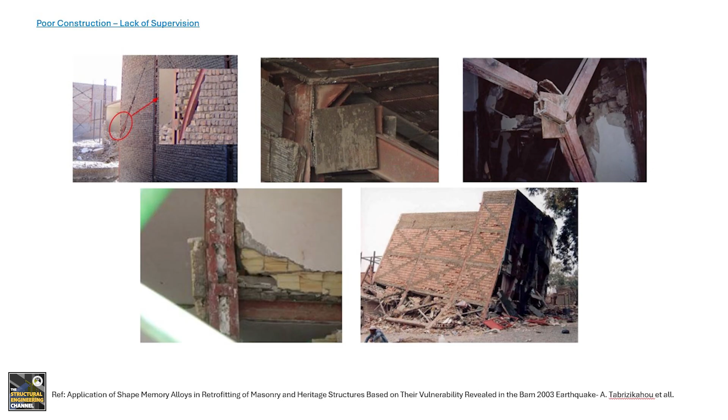My journey to structural engineering started because of my love of mathematics, physics, and creativity. But I got into earthquake engineering actually because of my personal experiences. I am originally from southeastern Iran, which is a very high seismic risk and active region. And I have experienced a few major earthquakes, such as the Bam earthquake in 2003. And that actually affected me a lot. And I wanted to pursue my study in earthquake engineering to know more about this inevitable event and be part of the global efforts to reduce the risk and reduce the impact on people.

Earthquakes are tricky because they are not just natural forces that are applied to the structures. They are really dependent on the structure itself. And if we have a structure with more weight, it will get more seismic forces. So to me, being part of the resilient design practice is very important, and I'm especially interested in multi-hazard analysis, like combining wind and seismic loads together, especially for renewable energy structures, which is a trend these days moving toward more sustainable cities.

Interesting. We had 3 earthquakes here yesterday in the Bay Area that people felt. Oh, and I've definitely lived through a couple of big ones as well. So it can be kind of life-changing, right?

Yes. What are the primary differences between earthquake engineering and then traditional structural engineering? I believe the differences lie in the focus on the design considerations and analytical approaches for these two. Actually, earthquake engineering is a specialized subdiscipline of the structural engineering practice, and it means that everything that a traditional structural engineer should know about the design procedure, material behavior, load combination, everything is required for a seismic engineer as well.

We can separate the regions into low, moderate, and high risk regions and apply different strategies. But in general, I think the strategy should be in policy making, design, construction, and utilization of structures, and in 3 steps: pre-earthquake, during the earthquake, and post-earthquake, regarding the loss estimation, the mitigation programs, or the lessons learned from the earthquake. Yeah, I know our codes are always getting updated. For me, looking at building codes every couple of years, you'll see a new section, for example.

Yes. I think there are some new ones for egress stairs, where you either have to take them into account in the building or isolate them from floor to floor. And I think that came from some photos of egress stairs just getting completely demolished during an earthquake and no one could escape the building.

Yeah. And it's always in the commentary. So that's really interesting to see how, hey, there's a new section of the code. What was it inspired by? Either by new research or, as you were mentioning, just from lessons learned out in the field after an earthquake happens.

Yes. And I think it's interesting too how you mentioned how they call it state of the art versus state of the practice, right? Because even once it is in the code, like the IBC, there's always that lag. And there's even more of a lag in certain areas, like certain jurisdictions, there's so much of a gap. When have they adopted it? When are they actually enforcing it? So it's pretty wild that there's such a big gap.

Yes. And the code books keep getting bigger and bigger. So I wonder how big it'll get. Yeah. For example, I know that the first ACI that was mentioning seismic was about 60 pages. It was in 1971. And today's ACI is about 600 pages. Of course, it has a lot of other things, but seismic is a big part of that.

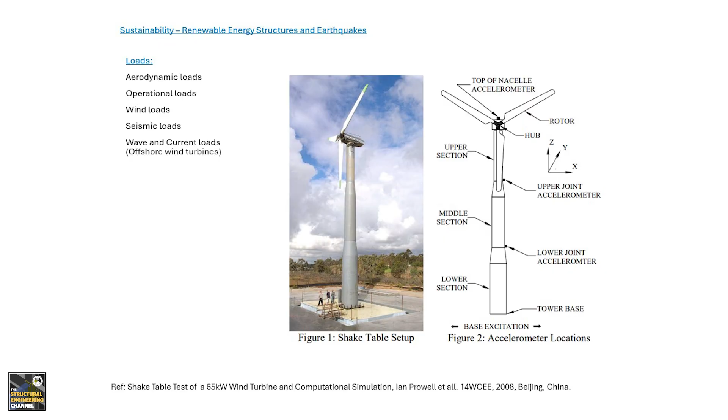For example, today there's wind energy and the increasing number of wind farms. These structures require their own criteria, because it's a totally different kind of structure from what we had, residential or even tall buildings. The second thing is, I think seismic requirements should be applied to both new buildings and existing buildings. There are a lot of old structures or historic landmarks that should be saved from earthquakes, and they need their own different criteria.

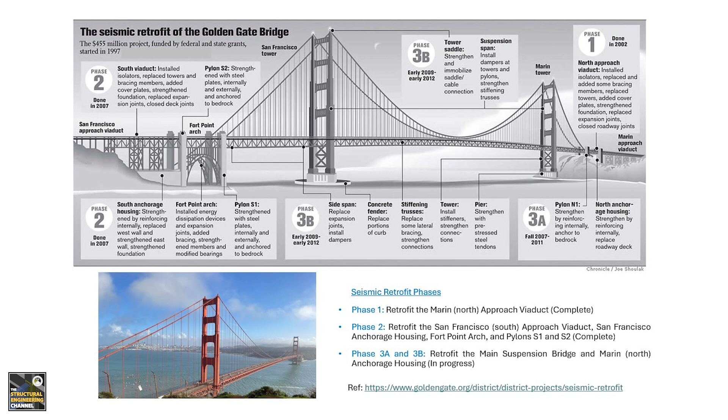One of the beautiful examples that I like very much is the Golden Gate. I have always admired it because it was built in the 1930s, and there were no seismic criteria back then. And it has experienced a lot of big earthquakes. It survived, not because of seismic design, but because it is a suspension and flexible structure that could absorb the seismic force.

But after one of the biggest earthquakes, Loma Prieta in 1989, they realized that it needed to be retrofitted for seismic provisions as well. And they did a great job retrofitting the piers, the structure itself, the cables, and installing sensors for monitoring the behavior of the structure. So this is another challenge.

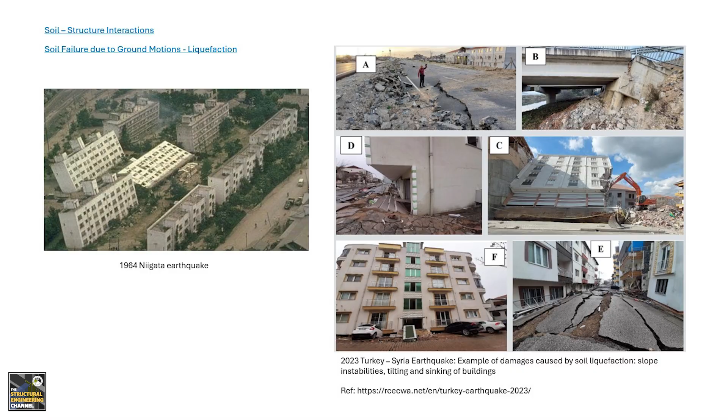One of the most recent challenges I can think of is climate change. It is not just affecting the daily life of people; one of the most important things in earthquake engineering is soil-structure interaction. Every change in the soil properties will change the seismic risk at a location. For example, floods washing away soil or changing the groundwater level will affect the soil in those areas.

Another example is multi-hazard regions. For example, California has both earthquakes and wildfires. The criteria should be updated for these kinds of multi-hazard events as well. How can we have safe buildings and structures against fire when we are using light wood to reduce the earthquake loads? There should be some balance between these.

You talked about a couple of those things that have happened in recent history for making advancements, but you mentioned this earlier too, new materials are constantly coming out and things like that. So what about recent advancements in anything like materials, technologies, research? How are those shaping structural and earthquake engineering practices?

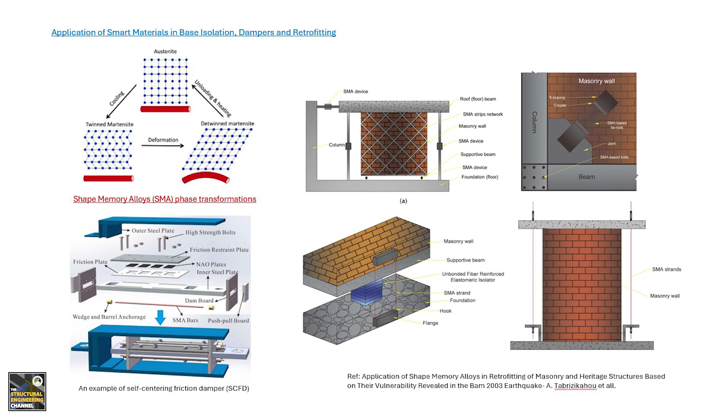Sure. There is this concept of smart materials that are used in, for example, dampers or connections or bracing systems to absorb seismic energy and dissipate energy. For example, shape memory alloys. These materials are used in the concept of adaptive structures. Adaptive structure means that they will go back to the original properties and situation that they have after the unloading,

with minimum residual deformation. When you're talking about those, I haven't heard a lot about those yet. Is it a specific type of building material that has that property, or is it its own material? Would you please explain more? What are you calling them? It is shape memory alloy. I think it is some kind of thing that should be added. So it's like a part of the metal mixture when they're creating steel or something like that? Yes. Okay, perfect. Thanks.

You're welcome. And there are also fiber reinforced concrete or polymers that are added to the material for more flexibility and more strength. And there's also, for example, the base isolation concept. Base isolation is used to separate the foundation from the structure itself, and that will reduce the amount of seismic load that affects the structural system. Or we have dampers with the different concepts of active or passive dampers. Another topic that should be considered is the sustainable solutions that we have.

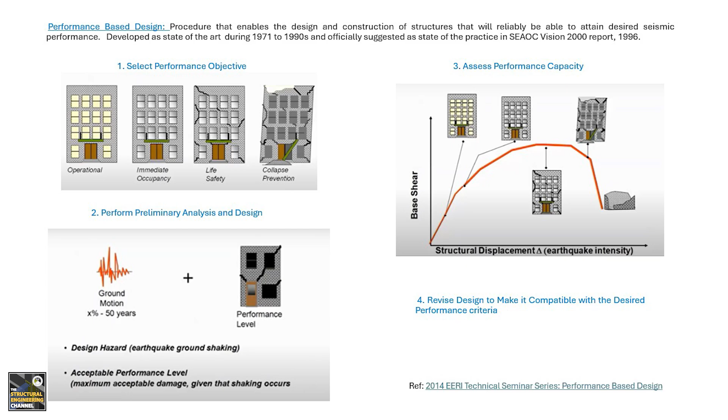No. For example, performance-based design is a good example, because you can define what you need from your structure. You'd like to have it operational during the earthquake, or immediate occupancy after the earthquake, or life safety, or just collapse prevention. All of these stages require their own criteria. And one of the things policymakers and investors do is decide which one they want for that structure. Based on that, everything changes. Yeah, it's really interesting.

A lot of what I do in my role is going out and talking to people about how to build code compliant structures. And we stress that when you build a code compliant structure nowadays in California, that's a life safety structure. Yes. And the general population, I think, doesn't understand that. Yes.

Like, that's not a concept that's really a general concept. Yeah, it's like code compliant means bare minimum. Yes. After an earthquake, you may need to tear it down. Yeah. But opening it up, or getting the public to know more about the performance-based design aspects. You can choose what level you want, right? So it's out there. Or I guess it's fairly new, in terms of a couple decades. But yeah, we have the technology to do that, and it's making the public more aware of their choices for their buildings.

Right. And what about regions that are resource limited? I'm not sure if Iran is, or maybe some other countries. Are there more practical methods to get these types of earthquake resistant systems implemented more in these types of countries? I think the very first step for every seismic region is microzonation. I mean, to do the research and study to have different regions with different seismic risk, and based on that, they can continue and apply the regulations. But it is not very affordable for all of the countries, as you said. I think this is the most important thing that should be done at the beginning.